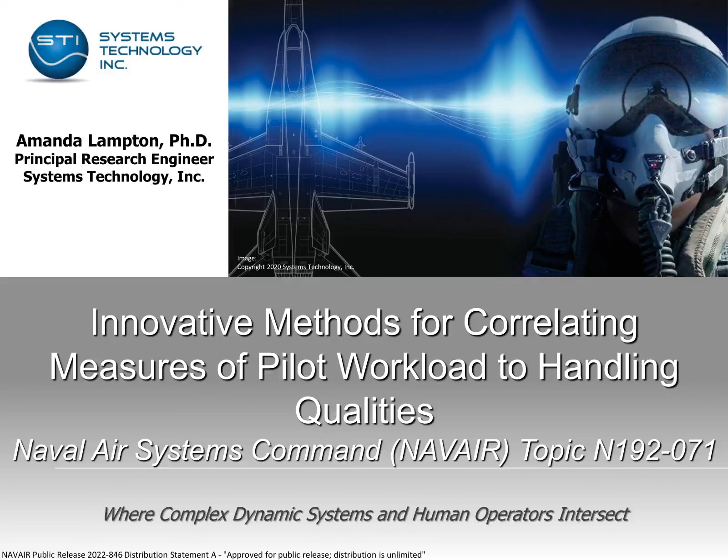I am Dr. Amanda Lampton, Principal Research Engineer at Systems Technology, Inc., and the technical lead for this SBIR Phase 2 effort. Today I'll give you a glimpse into our exciting technology that enables the characterization and prediction of test pilot-assigned levels of handling qualities and ratings.

But before I dive into that, let me tell you about Systems Technology, Inc., or STI for short. STI is a small company with technical expertise in vehicle dynamics and control, flying qualities, piloted simulation, flight test, and human factors. It was established in 1957 by two giants in dynamics and control, Duane McRuer and Irv Ashkenas. We are a 100% employee-owned business with offices, lab, and product assembly space in Hawthorne, California.

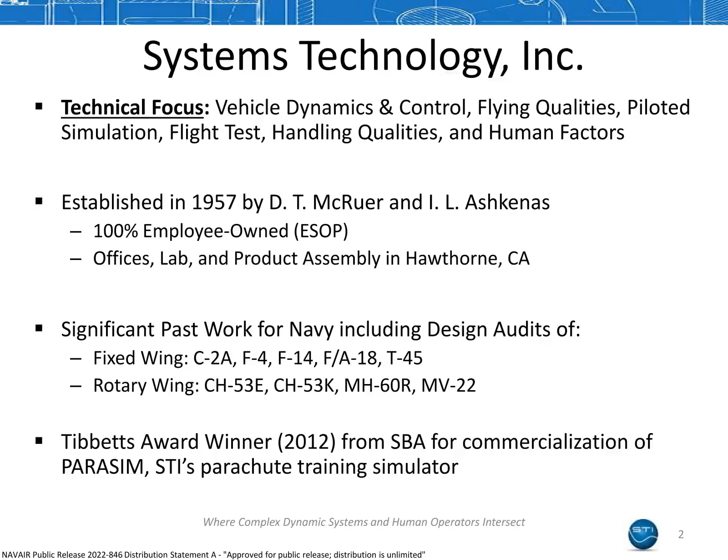We have significant past work for the Navy, including design audits, control design, and algorithm development for aircraft such as the C-2A, FA-18, CH-53K, and MV-22. We also won the Tibbetts Award in 2012 for our parachute training simulator, Parasim.

Now, back to the technology. The U.S. Navy set forth a challenge in the 2019 SBIR solicitation seeking test-enabling technology for the purposes of handling qualities evaluation and tuning in both simulator and flight test environments.

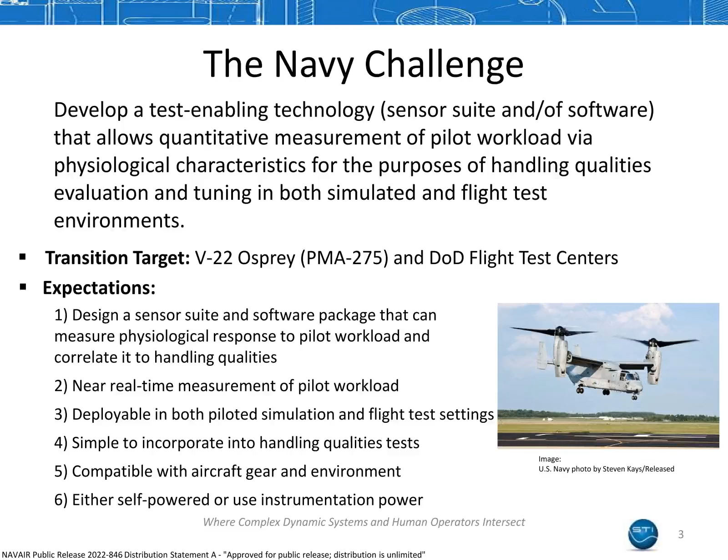The Navy envisions a sensor suite and software package that can measure physiological response to pilot workload and correlate it to handling qualities. The expectations for this system include near real-time measurement of pilot workload, deployable in both piloted simulation and flight test settings, simple to incorporate into handling qualities tests, compatible with aircraft gear and environment, and either self-powered or use instrumentation power. The transition target is the V-22 Osprey under the purview of PMA 275, as well as the various DoD flight test centers.

Now you may ask, why? Why should we care about characterizing and predicting handling qualities? What is the operational need? What could be improved? Well, self-assessed pilot workload is qualitative but highly dependent upon the pilot, task, conditions, etc.

In 1969, George Cooper of NASA Ames and Robert Harper of Calspan Corporation published their seminal report on the use of pilot ratings in aircraft handling qualities evaluations that produced the pilot rating scale still in use today. While several processes have been developed for pilots to rate workloads, such as Bedford workload and NASA TLX, a quantitative correlation between workload and handling qualities ratings remains elusive.

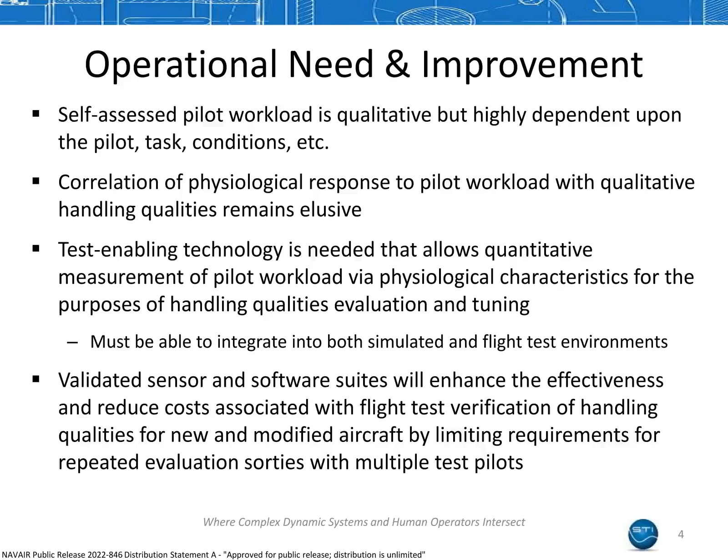Test-enabling technology is needed that allows quantitative measurement of pilot workload via physiological characteristics in conjunction with software to synthesize this and other performance and system data for the purposes of handling qualities evaluation and tuning. Validated sensor and software suites will enhance the effectiveness and reduce costs associated with flight test verification of handling qualities for new and modified aircraft by limiting requirements for repeated evaluation sorties with multiple test pilots.

Our solution is PASS, the Pilot Assessment Scaling System. PASS integrates a disparate mix of measures including task performance measures, pilot vehicle system measures, and physiological measures to better characterize and ultimately predict test pilot-assigned levels of handling qualities and ratings.

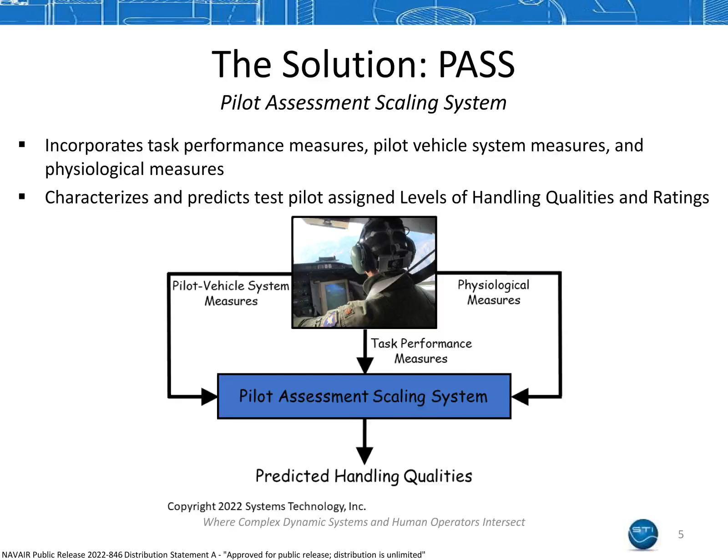Our development and testing plan for PASS is right on schedule. We are wrapping up our Phase 2 base program with algorithm execution, i.e. developing the process of reducing test data, applying machine learning algorithms, and building models for predicting levels of handling qualities and ratings. We anticipate Phase 2 option funding shortly after the conclusion of the base program.

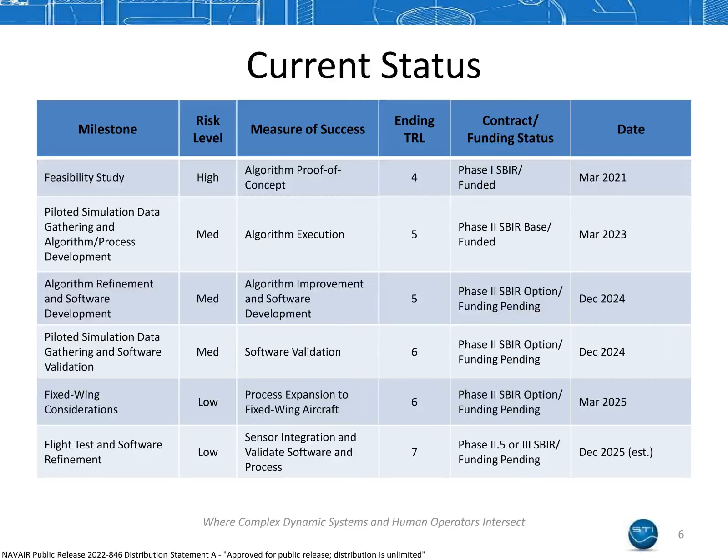The Phase 2 option will include further algorithm refinement, piloted simulation, and/or flight testing, followed by software validation and consideration of fixed-wing aircraft. This option will be a significant step in the development of PASS.

Now, allow me to reiterate PASS's key features. PASS blends disparate measures that impact pilot compensation and hence pilot ratings, including task performance measures, pilot vehicle system measures, and physiological measures to produce valid predictions of handling qualities.

The physiological data is gathered via commercially available hardware and software, thus keeping the cost of additional sensors reasonable. Finally, the software toolbox builds upon the industry standard MATLAB and its toolboxes.

The advantage of PASS as a solution include 125 years of corporate knowledge as well as its agnosticism to aircraft platform. This means that the process integrated into the PASS software can be applied to any mission task element for any aircraft, fixed wing, rotary wing, etc., without significant deviation from the defined approach.

What this brings to the evaluation of aircraft in the greater mission is enhanced effectiveness and reduced costs associated with flight test verification of handling qualities by limiting requirements for repeated evaluation sorties with multiple test pilots.

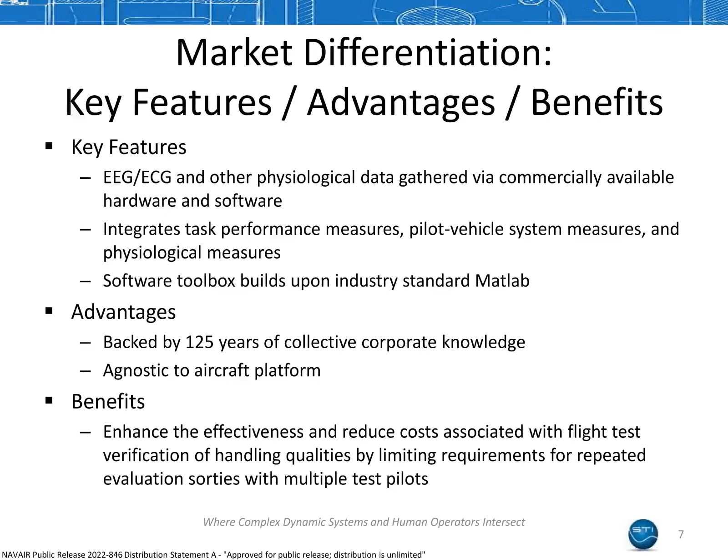We're in the final months of the Phase 2 base program of this SBIR program and are already looking toward transitioning this technology. In the base program, we conducted a piloted simulation test campaign with a generic helicopter model and 11 pilots flying 3 tasks.

We will execute another test campaign, either piloted simulation or in a variable stability helicopter, in the option to continue the development of and exposure to PASS.

Beyond Phase 2, we will cultivate continued interest from the primary topic endorser, PMA 275, and secondary topic endorser, PMA 261. We will also cultivate interest from those who expressed such, namely PMA 268 and PEO F35. We will also seek Phase 3 integration and flight test, as well as introduction of the technology to U.S. NTPS and Air Force TPS.

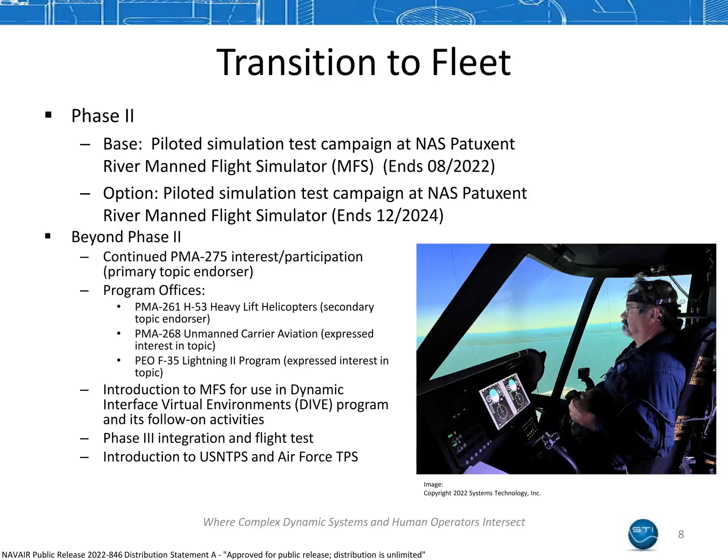The initial applications for PASS are the U.S. military aviation markets that develop and evaluate piloted aircraft. This market includes DoD flight test centers, for example, NAS Patuxent River and Edwards Air Force Base, military test pilot schools, and prime and Tier 2 aircraft manufacturers.

Secondary markets will be identified from these same entities in U.S. allied countries. PASS will also find utility in the commercial marketplace where handling qualities assessments are an important part of the civilian certification process.

Here, an emphasis will be placed on commercial transports, business jets, and the emerging urban air taxi market. The emerging product is the Pilot Assessment Scaling System featuring machine learning-based algorithms that will be used to predict levels of handling qualities for both fixed and rotary wing aircraft.

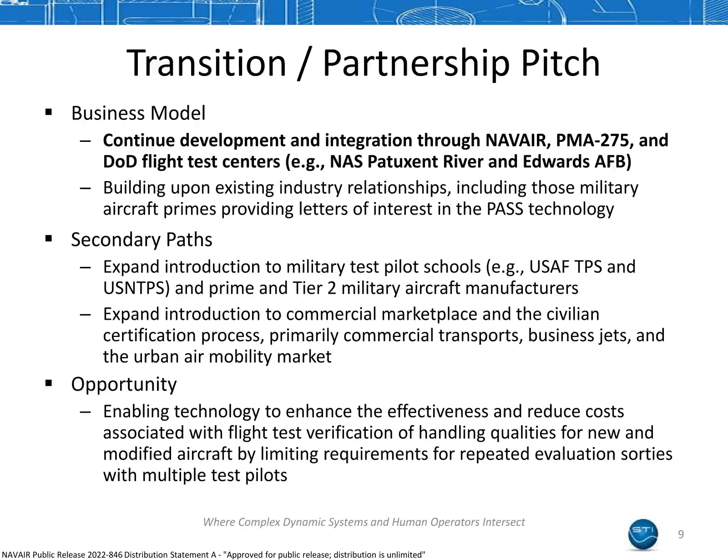A validated PASS will enhance the effectiveness and reduce costs associated with flight test verification of handling qualities for new and modified aircraft by limiting requirements for repeated evaluation sorties with multiple test pilots.

Thank you for listening to my Tech Talk. PASS is an exciting new technology that can benefit any aircraft platform, large or small, fixed wing or rotary wing.